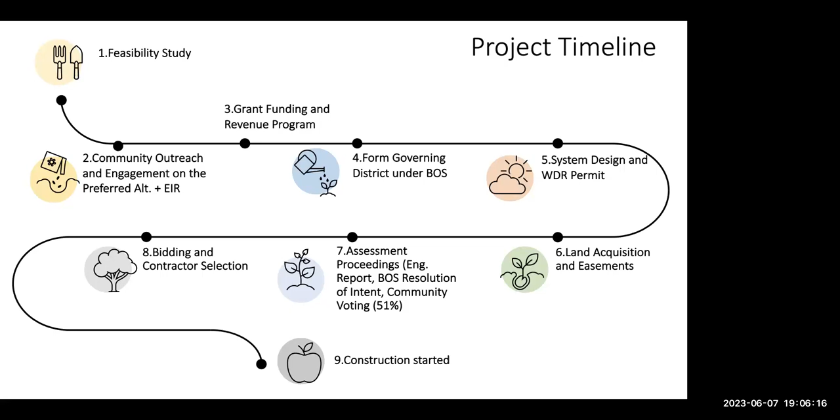And with that being said, and not taking a lot of time, I would like to start and show you the timeline. This is the timeline for all the steps involved in this project, and it will help guide us through the project steps.

As shown in this timeline, we are currently in step 1, which is the feasibility study. We are doing this feasibility study to analyze and compare the various alternatives to identify the best wastewater management plan for the community.

In step 2, which involves community outreach and engagement, I believe the community can select the best preferred alternative, either through a questionnaire or through a survey.

Once this alternative is selected, we can proceed to step 3, where we must secure funding through grants or low interest loan programs, which is actually a very critical step in this project.

Moving on from step 3 is step 4, which involves forming a governing district with the help of the Board of Supervisors. Step 5 requires us to submit a request to the Regional Water Board for a small domestic wastewater discharge permit for the design and operation of an on-site wastewater treatment system, called OWTS, along with an updated detailed system design.

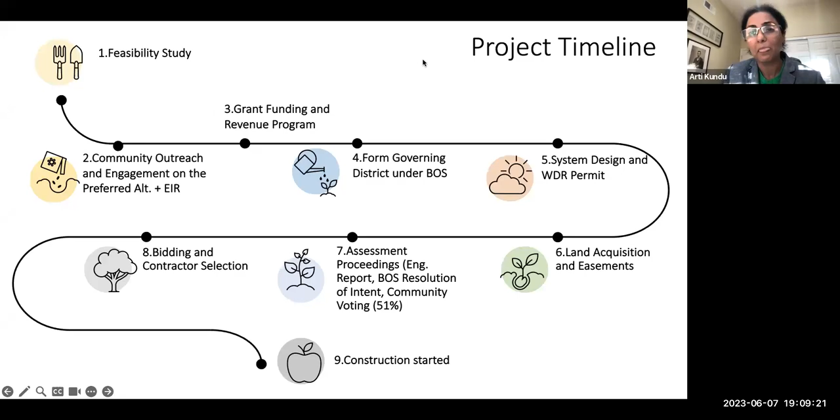And now we're going to switch to Norm. So Arti's got command and control there, so she's switching presentations. Okay, great.

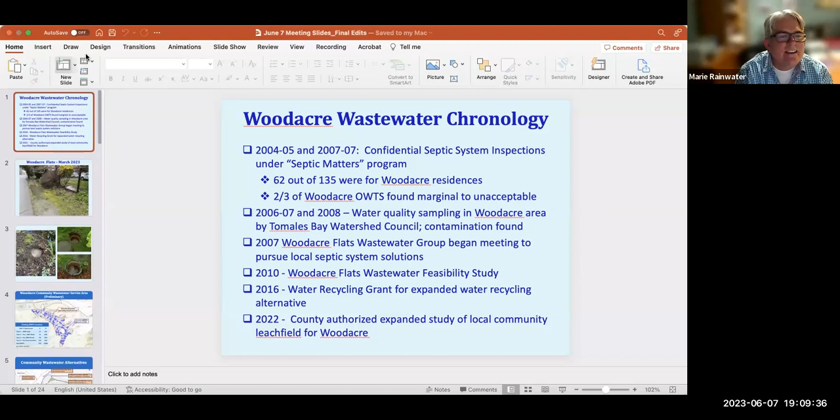We're located over in Point Richmond. We've been working in and with Marin County for many years on different projects and wastewater systems in Marin and other areas in the Bay Area. Pleased to be here this evening to tell you about the progress we've been making with the feasibility study and answer questions. Hopefully we can get through this material and answer things that are on your mind, and tell you about some good progress that's been made.

I thought a good place to start would be a little chronology. These are just some of the highlights, not everything that's been going on over the years, but the efforts in the Woodacre area probably go back about 20 years or so.

Back in 2004-05 and 2007, Marin County implemented a program called the Septic Matters Program, which offered confidential septic inspections throughout the county to homeowners. The majority, in fact close to half, of those asking for that service came from Woodacre residences. Of those inspections done in Woodacre, the findings were that about two-thirds of the systems looked at were marginal to unacceptable.

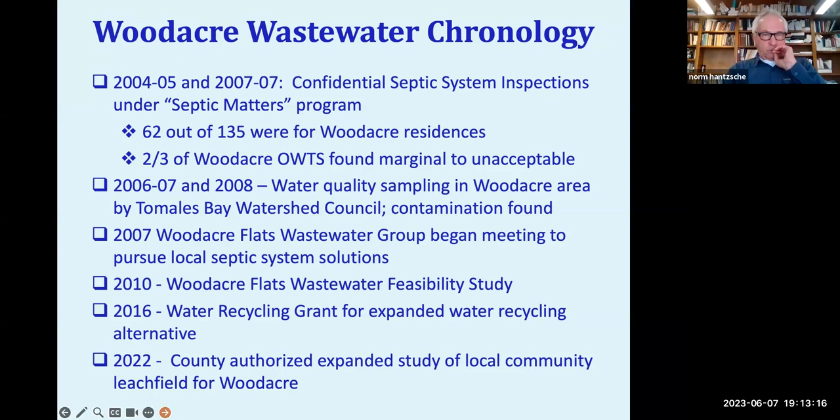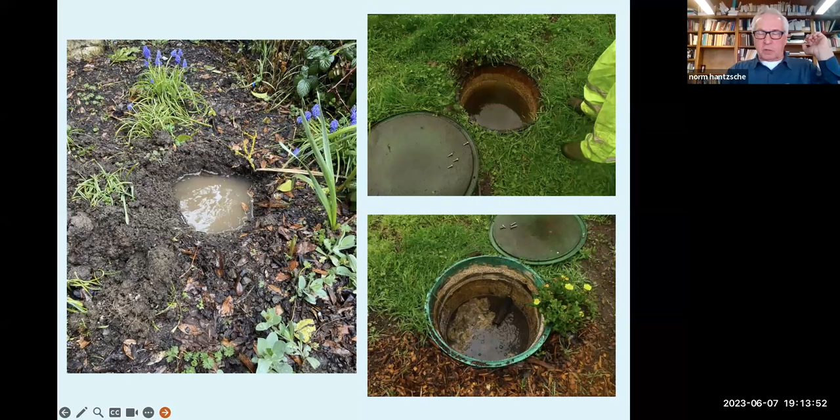This is a few slides just to look at some of the conditions that the Woodacre Flats area has to deal with, from this last year. High groundwater conditions, very clay soils. The railroad avenue, which is an old railroad grade, causes an obstruction of water movement through the area, and the flat terrain leads to some pretty serious groundwater conditions, which are not conducive to septic system operation in winter conditions.

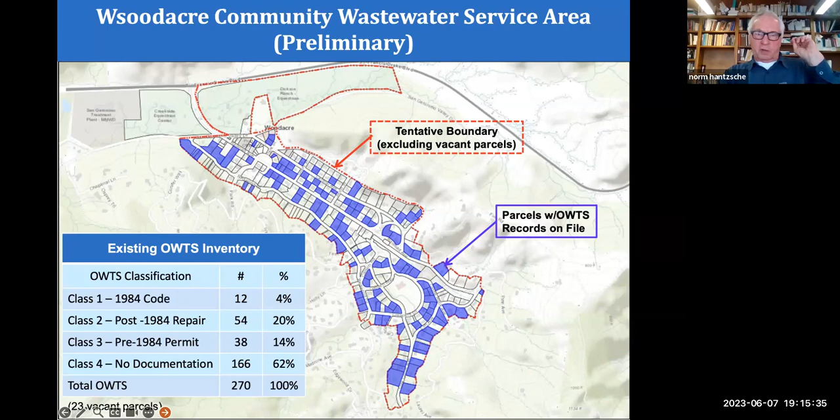There are also about 23 vacant parcels within this diagrammed service area. The project is not studying alternatives to serve vacant parcels, just developed parcels.

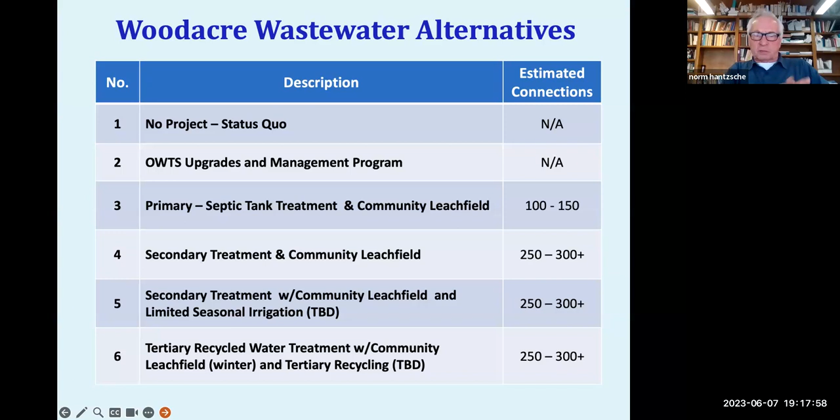So looking at status quo, I won't spend any time on it. Everyone kind of knows the status quo, but that's a baseline always looked at in a study like this. Alternative 2 would look at forming an on-site management district, something along the lines of what is in operation in Stinson Beach and has been for 30, probably 40 plus years. It involves forming an entity, likely under the oversight of the County Board of Supervisors, called an on-site management district or zone.

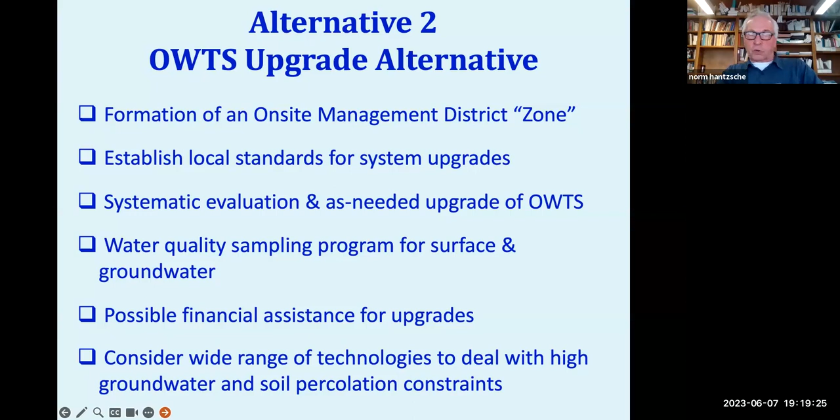It would allow for establishing local standards to streamline the design, approval, and implementation of septic system upgrades. A systematic, over some period of time, evaluation and then upgrade of existing septic systems. There would also be an ongoing water quality sampling program, surface and groundwaters, to track the current impacts and improvements over time. It's possible that with the formation of a district there could be some financial assistance for upgrades, but nothing is guaranteed. And then there's the opportunity to consider a wide range of technologies for dealing with high groundwater and soil percolation constraints in Woodacre, which are really quite severe in some areas.

Okay, so just briefly, the elements. I'll talk now about the community wastewater options, and these are the elements that go into a community wastewater system that will be part of each of the alternatives. There's the collection system, and we're talking for the Woodacre area about an effluent sewer system, and we'll go into detail later about what that is and what it looks like.

Treatment has different levels: primary, basic septic tanks, secondary, and tertiary, just more sophisticated treatment from primary through tertiary. Disposal, we're looking at a community leach field as the only wastewater disposal option. There's no surface discharge. And the last item is recycling, to the extent that that is built into any of the alternatives, where the water can be treated to a level that it could be used for irrigation, dust control.

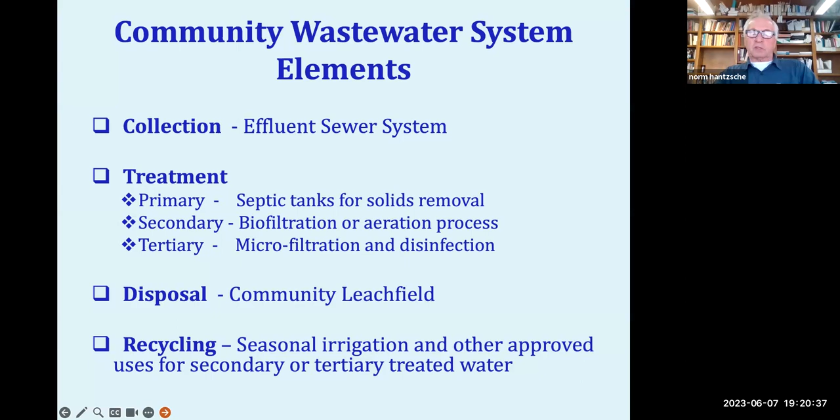At a tertiary level, there are much more extensive uses, including toilet flushing and so forth. But those are the elements of a community wastewater system. Okay, next slide.

So the effluent sewer system consists of a network of piping, small diameter, 4-inch diameter piping that can be installed by what we call horizontal directional drilling rather than trenching. It's a trenchless installation process, where you dig a pit at one end and you have your drill device, and a pit at the other end. You drill from one end to the other parallel to the ground surface, but down at the depth of your pipe, and then you pull the pipe through. It's a fast process. It avoids disturbance of the streets and is well suited for installing effluent sewers.

In the sewer system, the effluent sewer only carries the effluent, the liquid portion of the septic tank effluent from a house septic tank. Each house would have a septic tank with a gravity connection, or possibly a pump connection. We've estimated about 80% would be gravity connections in Woodacre because of the lay of the land. The sewer would just take the liquid portion, and the solids be retained in the tank. The homeowner would be responsible for the pump out of the tank, just as they are now.

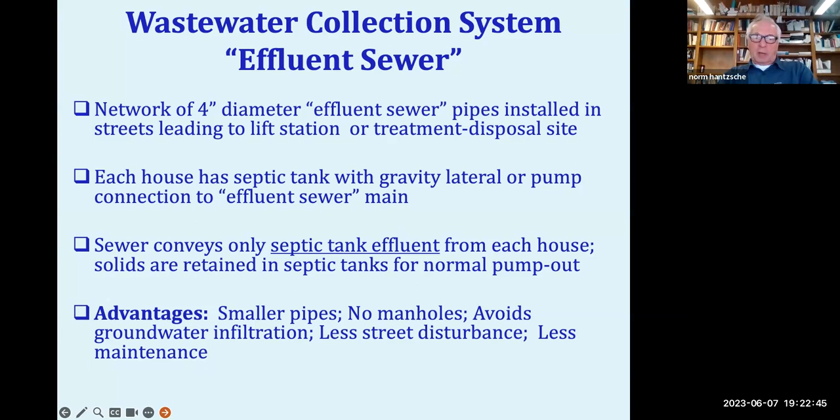Advantages: smaller pipes, no manholes like you would have in a normal municipal sewer system. It avoids groundwater infiltration. This is probably the biggest issue in Woodacre, because the pipes are fused together pipes. They don't have connections that can come apart, and they don't have manholes. And there's less maintenance and disturbance.

Next slide, please. This is to get a visual of an effluent sewer system. I've shown on the left-hand side, in the white boxes with blue lettering, STEG at the top, STEP at the bottom. STEG stands for septic tank effluent gravity. So in that one, we have a house with a septic tank, and it has a gravity connection down to the main line, a 4-inch main line, which is running on the edge of the street. That's called a STEG system.

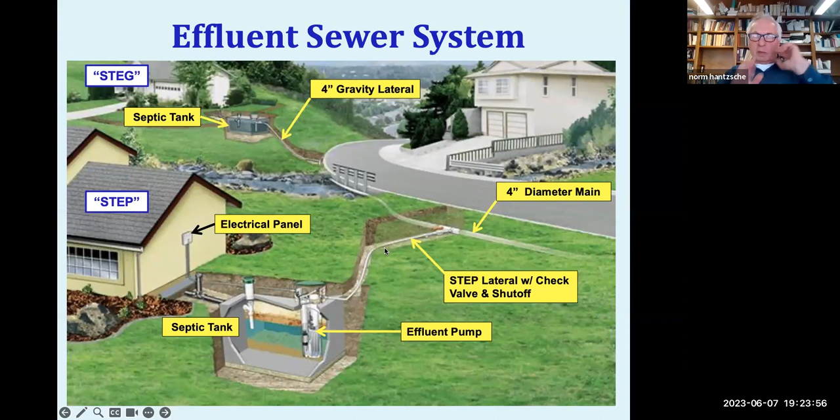About 80% of the properties in Woodacre could be connected to this effluent sewer by that manner. And the lower one, where the house is below the elevation of the main line in the street, it would be a STEP system, septic tank effluent pump, where you have a septic tank. A pump goes in the second compartment of the septic tank, and then there's small diameter piping with check valves that pumps up to the main sewer system.

Next slide, please. Okay, now to go through alternatives 3, 4, 5, and 6, I'll again point to the features here. We've got the boundaries of the service area. Blue would be the effluent sewer lines we just talked about, and all of those would be gravity lines. There's a dashed blue line, where the arrow is now, indicating a pressure line to pump back in a southerly direction on Redwood Drive, because of the slide that has occurred recently on Redwood. The other lines would all then drain down to lift stations, a sub lift station at the bottom of Redwood, and then a main lift station at the intersection of Railroad and San Geronimo Valley Drive. From that point, the effluent would be conveyed in a force main under the different alternatives to either the treatment location on the Dickson Ranch property or directly up to the leach field site on the Dickson Ridge site.

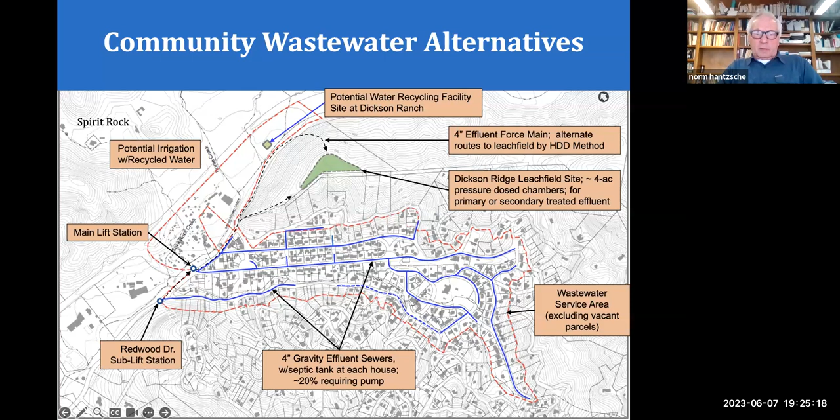Okay, next slide, please. So I'm going to go through just briefly each of the four alternatives, 3, 4, 5, and 6.

Primary treatment, effluent collection system, main lift station, and the force main to the leach field would go up San Geronimo Valley Drive, installed by horizontal directional drilling, so there would be no trenching on that street, and it would be a fairly short construction period to install.

At the Dickson Ridge site, a 100% community leach field and 100% reserve area for the flows for that alternative, with capacity for up to about 150 connections with primary treatment only.

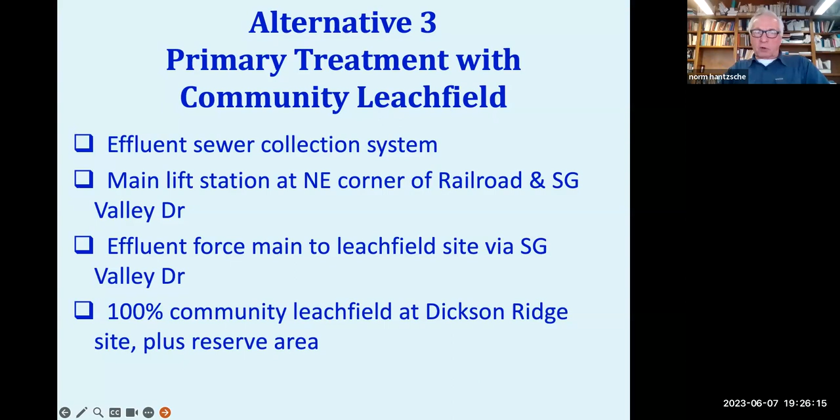Next, we go up a notch with alternative 4, and I've highlighted in red what the differences are. Instead of the force main going up to the leach field site, the effluent force main from the main lift station at Railroad and San Geronimo Valley Drive would go to the Dickson Ranch property.

It's in one of the fields where they currently do most of their manure composting, horse manure composting and storage. We've located and worked with the family there to identify a site and how that could be integrated. From that point, after treatment, the water would be pumped under San Geronimo Creek and up the hill to the leach field site.

All of the pipeline work would all be horizontal, directionally drilled installation. At the leach field site, the difference compared to alternative 3 would be that it would require less leach field for the same capacity, or it could provide for greater capacity because of the additional treatment received at the treatment system.

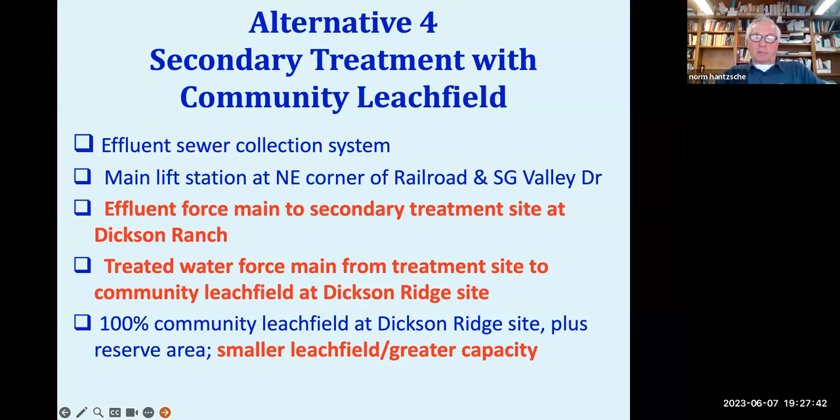Alternative 5's difference from alternative 4 is the addition of disinfection following secondary treatment, envisioning the same secondary treatment process that would make the water suitable for surface irrigation and other approved secondary recycled water uses. The uses for secondary water are not as extensive as for tertiary water, but it is suitable for pasture irrigation, open space irrigation, and dust control.

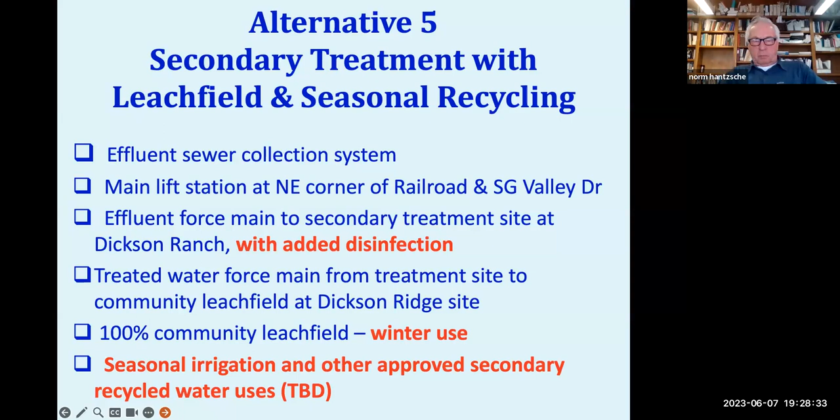There's been some discussion with the Dickson Ranch about using the water for conditioning the manure in their composting operation. Now, last alternative 6.

Here the difference is we change from secondary treatment to tertiary treatment, which is really just adding an additional filtration, microfiltration process, and disinfection, but it does also add additional redundancies, monitoring and testing, because tertiary treatment under state water recycling standards makes it available for use in areas where there's a higher risk of or opportunity for human contact.

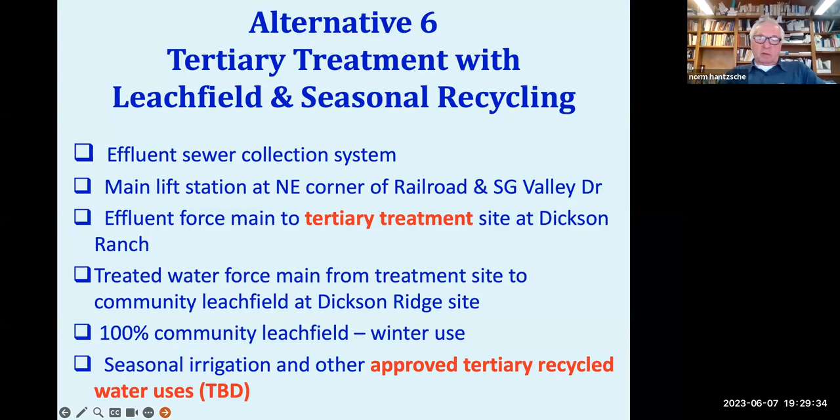So that was the type of treatment that would have been used for golf course irrigation. It can be used for landscape irrigation in developed areas, and also for interior house toilet flushing if that were available.

Next slide. This is an aerial showing the location on the Dickson Ranch site where the proposed treatment plant would be sited, 100 feet minimum from the seasonal creek on the left, and from San Geronimo Creek, which is below the treatment site. That's about a 10,000 square foot area that's diagrammed there.

The Dickson Ranch is to the left, and you can see the location of the proposed leach field site on the south side of San Geronimo Valley Drive and up the wooded hillside from where the treatment plant would be located.

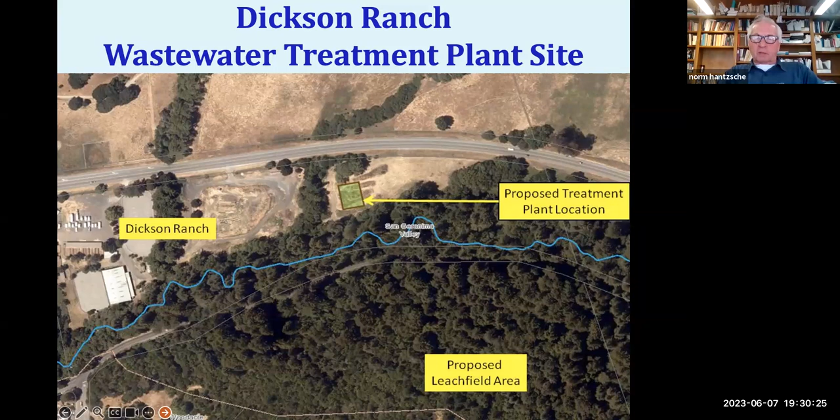This is a photograph of another small community treatment system using the same technology that would probably, but not necessarily, be the selected treatment technology for this—a small building. This serves a community of about 130 residences. It's different in that it takes a standard gravity sewer rather than a septic effluent sewer system. They have infiltration problems, a larger system, but this is what the treatment system would likely look like.

Those structures you see, they're almost about the size of a manure pile, but they have tops that hinge open. Within that treatment system there's a synthetic textile filter material called an Advantex system. A lot of residential Advantex systems are in use in Marin County. This is a multifamily commercial scale Advantex system, in a configuration they call the AX Max, if you're familiar with that.

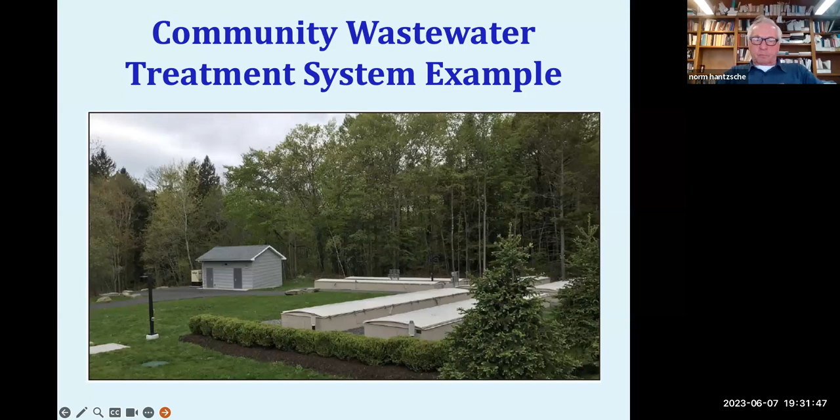Next slide. Okay, the Dickson Ridge leach field site—briefly, site conditions we found back in 2010 were excellent, and we were quite interested in that site as a local option for the Woodacre Flats area. It's about 25 acres overall. The portion really suitable for wastewater disposal is about 4 acres, which probably not all of that would be part of the project, with 10 to 35% slopes and good sandy soils over weathered sandstone.

We were out there this year in the heart of the wet weather season in February. There is no groundwater observable to the depth of our exploration. Good percolation, setbacks—there are 2 ephemeral drainages on the site, and the carrying capacity would be based upon the trenches and the nitrogen loading.

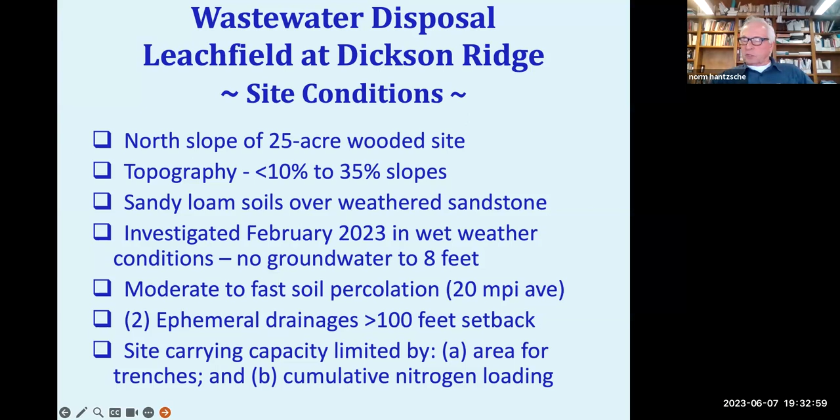So the site has some good stands of redwood, madrone, bay, fir in some places, and some tan oak and coast oak. But there's also a lot of understory, small trees struggling, and a lot of fallen trees.

But you can see there are good stands of redwoods. The leach field development in this would be in the areas between trees. The clearing would be only of trees of a smaller size, not any of the protected species.

We've had an arborist at the site, Kent Julin, who many of you may know locally. He identified and provided a report for us on his assessment of the trees and recommendations on how to design around the trees which were the most sensitive, and provided setback recommendations. He also noted that in his opinion, the nutrients and water from the leach field system would benefit tree health, and thinning the understory and smaller trees would actually also benefit the trees through reduction of wildfire hazards.

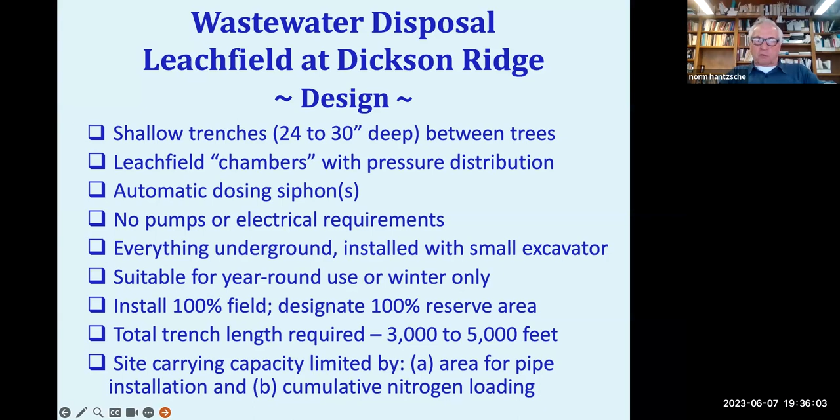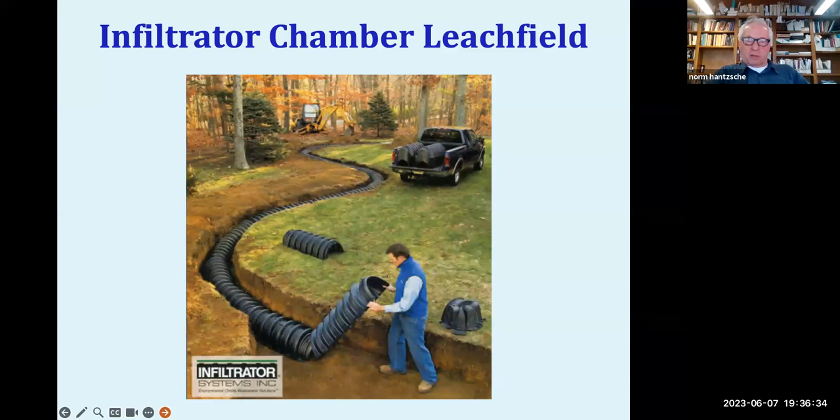This is just a graphic of the leach field chambers. What this really does is allow you to develop the leach field without bringing in a lot of gravel and a lot of construction equipment. The material can be hand placed and hauled to the site, and the piping would be inserted within that. There would be a small amount of gravel on the base of the trenches.

What this means is that when the project is developed, the septic systems - whether they're upgraded from what's on the property now, or whether it's a completely new installation - that would be a project cost, paid for just the way the piping in the system and the treatment and disposal systems are.

This has been a practice in state funding going years back, because the septic tanks are providing part of the treatment process. This is not the way it works if you have a standard sewer system and you just run your pipe from the house to the sewer - that's a homeowner cost. Here, the septic tanks are vital to the overall treatment process provided by the system, and that's why they're included as a project cost shared by the overall financing of the project.

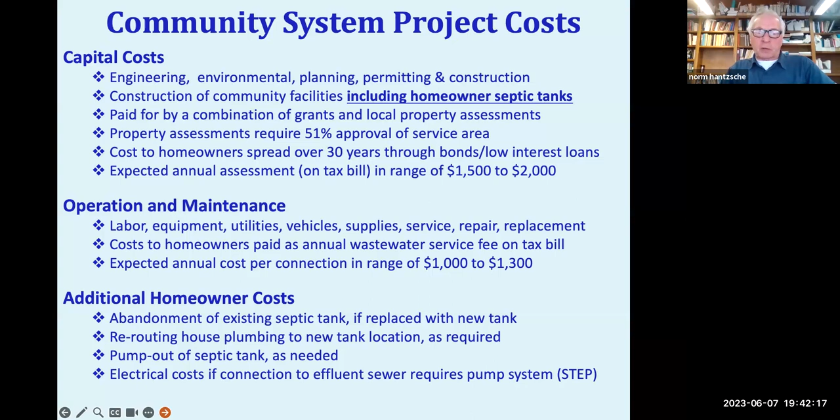So I think that's my last slide. And hopefully I was within my time frame, more or less.

Sorry, I was talking to a muted mic there. Yeah, you're slightly over, but I think we're good. I think we can keep going.

Really quickly, there's a question I think you already answered, Norm, but I just want to confirm it because we can tick that one off. It's a written one in the questions app here. The laterals installed, are they included in the project costs? So the laterals from the tank to the system? Yes, that's included. Okay, so now that one got answered.

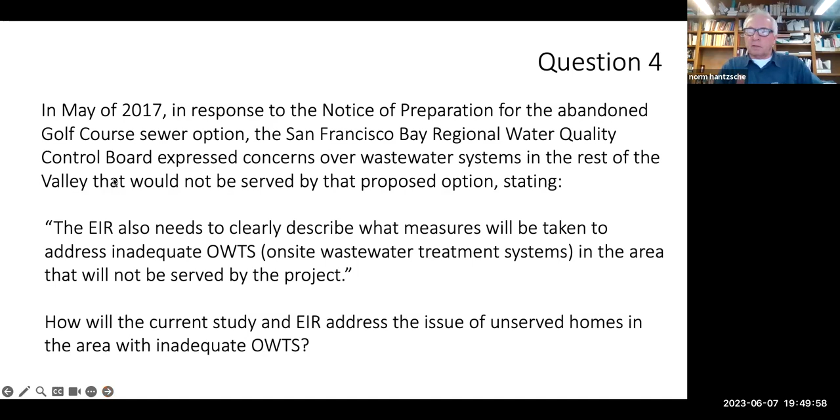Could I add one thing to that? The regional water board staff has already been to the Woodacre area, has toured the Dickson Ranch properties, and they've been brought up to speed as we've been doing the study. So the current staff is well aware and informed on the project and the alternatives that we're looking at.

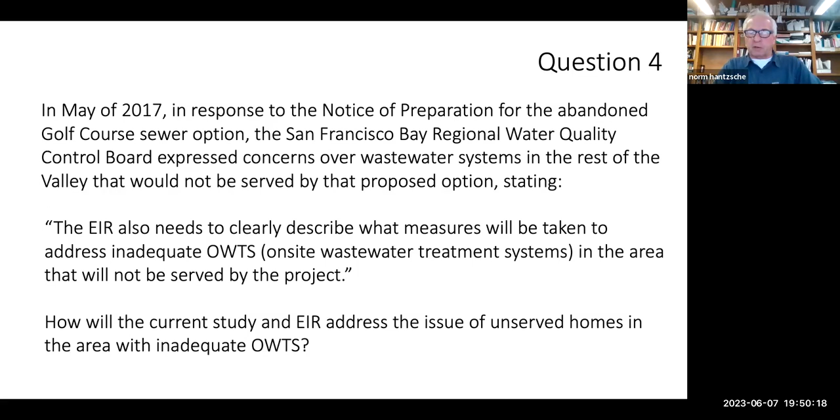Okay. Next question. Will the survey go to only Woodacre residents or other Valley residents?

So the survey that was sent out, and this was sent out by Questa, went to all of the residents in the service area. We're also about ready to put on the county's website a survey that doesn't get into quite the detail of the mail-out survey, that would be available for other residents in the surrounding communities. And RT will be, I think, providing some information on when that becomes available, but that should be fairly soon. Okay, next question.

What percentage of a return do we need to get on the survey to be a legitimate community outreach?

The questionnaire survey has many different objectives. One is really to engage with the community and inform them of what's going on, but also to get feedback on level of interest and what the concerns are, to help in a general sense going forward for the Board of Supervisors, funding agencies, regional water board, and others who may be partners in funding or helping the project move forward. So there isn't a fixed limit of how many we need.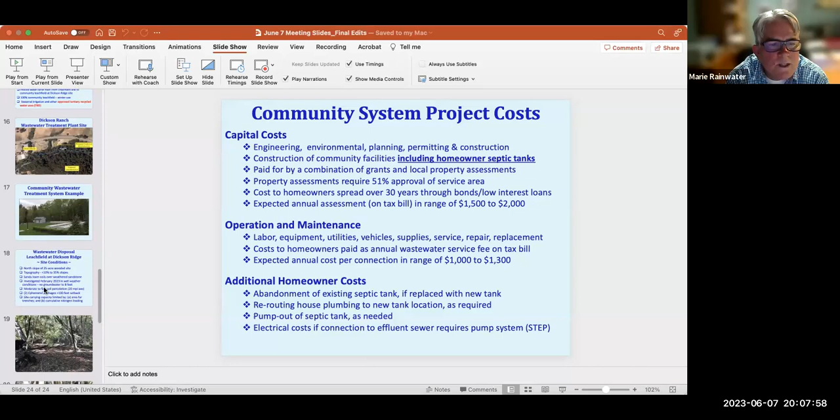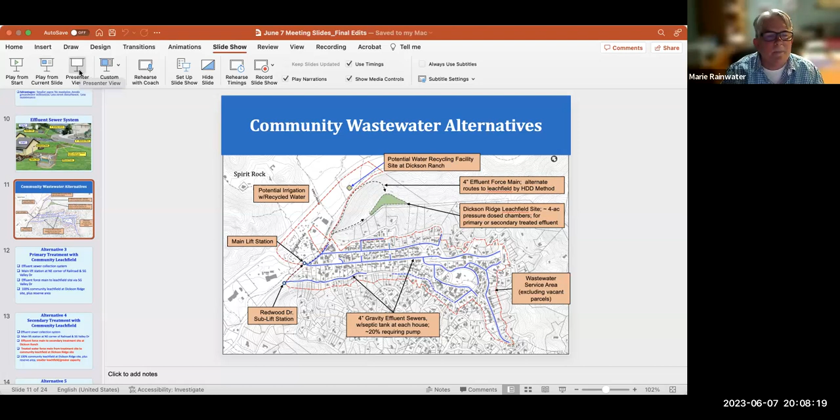Yeah, there we go. Okay, so can you see my mouse? No, your mouse doesn't work. So on that, anyway, right along what looks to be Central Avenue. Oops, it's gone, the graphic. She's putting it on presentation mode so it'll be bigger. Can you, you missed it. Okay, the far left one there. Whose ever mouse that was, it was on it just a minute ago. There's a line that looks like it runs up. That's not, don't put play. Oh I see, presentation mode, there you go. What's happening? Okay, now presenter, sorry.

So there's a line that looks like it runs up Central Avenue, and towards the end of where that line makes its turn, there's two lots there. And the lots behind the houses below don't have a line in front of them. So do those houses have to go through the property in front of them, okay whose mouse is that? That's what I'm talking about, right?

Where that, just below where that mouse is, that's already inside that line. No, go up. Okay, now go up one more lot. Now move over, opposite direction. Okay, stop, now right there. And according to the map, there's a house up there. Is that one parcel or is that two parcels?

You know, I can't say that I know. Well, I guess the question is, will anybody's line to the effluent, to the main line, run through another person's property? No, there'd be no intention for that, and especially with small diameter piping, it's relatively easy to make sure we get to every property. So no, there's no consideration of having easements between properties to run the sewer lines.

So then somebody who has an abandoned lot in that situation up above couldn't really join the system very easily. They'd have to run a whole new line to catch up with the existing line. That would be part of the project, right Norm? Yeah, to be part of this project. No, I mean, the laterals are part of the construction project, right?

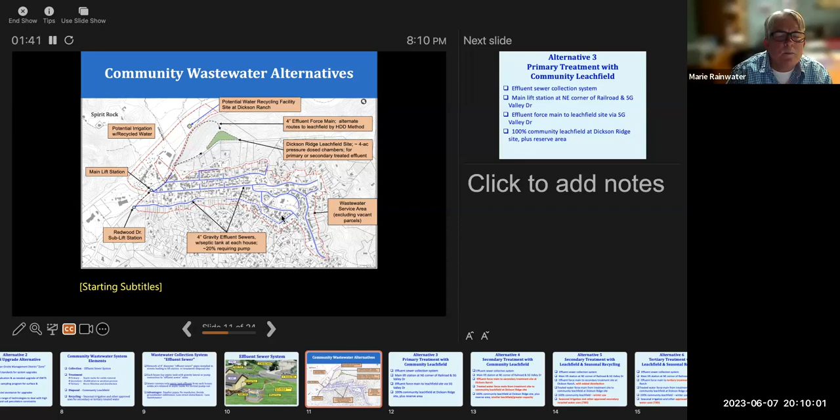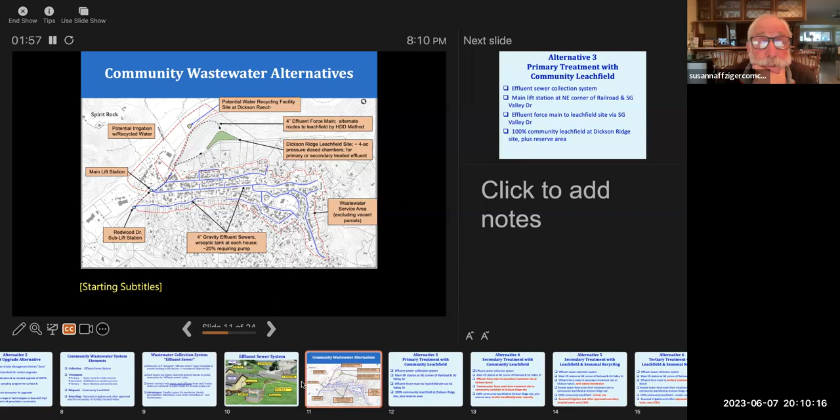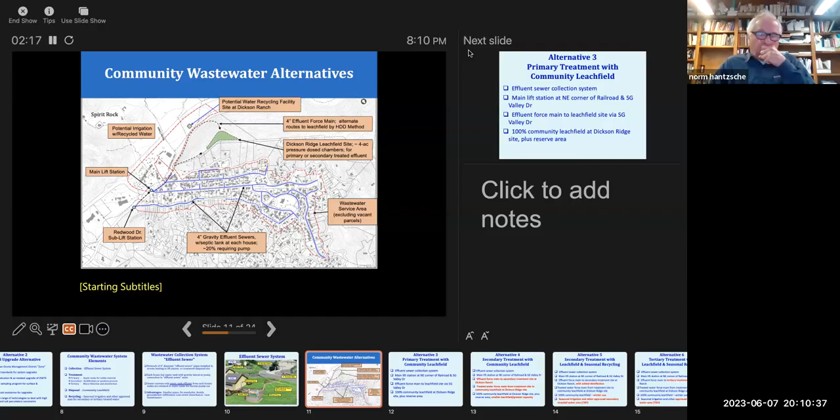There's a property up there that looks like a house that doesn't have access to the line. If they wanted to join, how would they join? I'll take a look at that. It wasn't the intent to leave anyone out. The design intent is that everyone included in this project would have a line in front of their house, and they wouldn't have to go through another person's property. That's correct. Okay, thank you, we got there. All right, I'll go to the next written question.

Will installation of pipes from septic tanks to community effluent pipes require trenching, or would that use horizontal installation like under the streets? Would it be the same for the laterals? There may, in some cases, be directional drilling for the laterals. In general they probably would be trenched, but if they're a longer distance, that would certainly be considered. No one's got their hand up, so I'll go to the next written question.

Do lots on Central Avenue require pumping to the community effluent pipes? If so, is the homeowner responsible for those costs? Could existing septic pumps be used for that? Most likely existing pumps could be used. This question was about a connection on Central where a pump was required, where you have to pump from your property to the effluent pipes. Would the homeowner be responsible for those costs, or could the existing septic pump be used? There seem to be two components based on the previous slide - maybe electricity costs, but the lateral cost would be covered by the project, is that correct? Correct, the lateral cost would be covered by the project. If the pump was determined to be suitable, it probably could be used. I think it'd be a case by case situation, but we'd try to work out the most sensible solution.